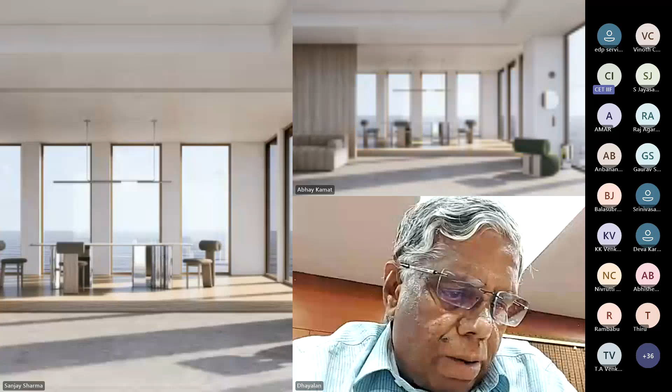We have invited Mr. J. Balasubramanian, who is currently working with Ashok Leyland Limited. I am having great pleasure in introducing Mr. J. Balasubramanian. He is head of analytics, AI and emerging technologies at Ashok Leyland. He is a dynamic, well-rounded visionary, innovator and leader with more than 26 years of experience in the automotive industry.

As a thought leader in data science and analytics management, he is passionate about using technology and data to address business problems. A practitioner of foresight and horizon scanner for new technologies, he has been leading creative artificial intelligence powered analytical projects that address the need for technology across business disciplines. He is highly sought after for business process re-engineering initiatives, and he has been part of large-scale business transformation projects that leverage digital technologies at Ashok Leyland.

He is known as a positive influencer with propensity for leading, mentoring and managing technical and behaviorally diverse teams. Mr. Balasubramanian holds a master's degree in statistics and he is an alumnus of Indian School of Business.

In today's session, Mr. Balasubramanian would be sharing his views on the role of AI and machine learning in Foundry, taking us through the opportunities for leveraging artificial intelligence to enhance efficiency and innovation in Foundries. Now I am leaving the floor to Mr. J. Balasubramanian. Sir, now the floor is yours, you can start the presentation.

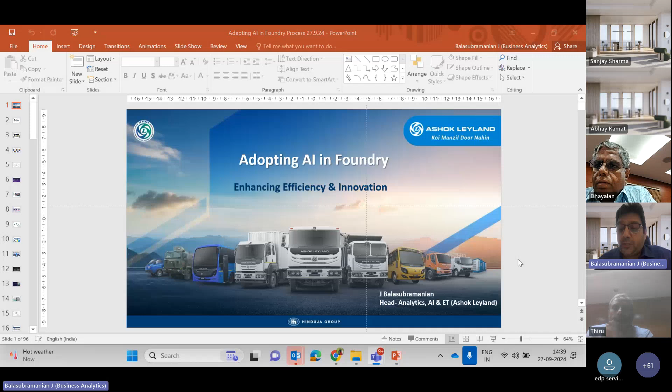Just when somebody says audio is not clear - am I loud and clear? Yes, you are very clear. Okay, thank you, just a minute. Let me start sharing my screen and let's get started. Please let me know if my screen is visible. Visible, sir, yes sir. Visible sir, thank you.

So let's quickly get into the presentation. For the next course of 1 hour and 1 hour 15 minutes, I will try to take you through the various facets of artificial intelligence, how the applicability is there in Foundries, and the kind of synergy between AI and the work what we do at Foundries.

It will definitely be very useful to know people who are keen and have an aptitude to work with numbers and try out more mathematical algorithms to improve the efficiencies of foundries. So without much ado, let's get into the topic.

Just to be quick, I represent Ashok Leyland and I've been part of this organization for close to 26 years now. I joined after my graduation, and I'm privileged to be associated with this organization for a very long time, having had stints across various functions, which gave me immense opportunity to learn.

For people not aware about Ashok Leyland, we are the second largest manufacturer of commercial vehicles. We have a full range of vehicles from 2.5 tons to 49 tons gross vehicle weight, and buses from 16 to 80 seats. Our annual turnover is 2 billion plus, and we are listed on the NSE. We have several manufacturing facilities, including 2 foundries, one at Ennore near Chennai and one at Sri Perumbudur. These are our 2 major foundries, and we cater to both in-house and external clients.

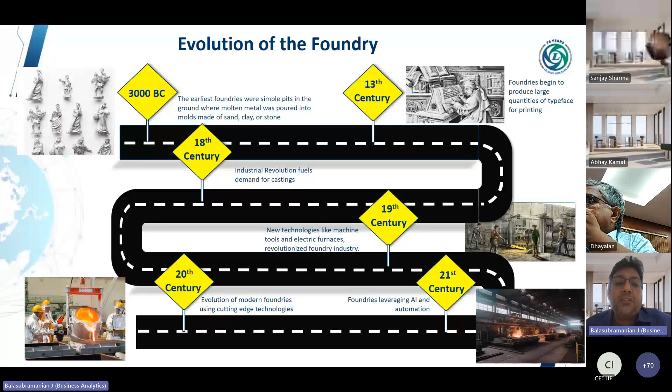To me, while the foundry industry has evolved over time, the fundamental core principles of manufacturing remain the same. I'm not a person who has worked in foundry or manufacturing directly, but from a third person's perspective, observing multiple different industries has given me a lot of opportunity to learn about the entire foundry industry. I find that the commonality across these industries, in terms of foundry, remains in how castings get developed.

For example, we start with the preparation of sand for casting. Then we look at how we manufacture cores, which help make hollow castings. Then we look at melting metals, putting the molten metal into the mold, and finally doing the fettling and grinding work to ensure the end product comes out perfectly. So the core 5 main activities remain the same, and today's topic focuses on how AI will be helpful in each of these activities.

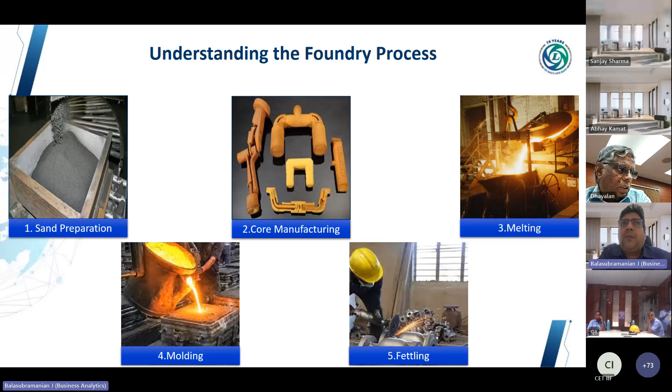So that's what I'm going to explain, how every single activity, though this has been happening for centuries together, but today how AI can play a much better role to improve the efficiencies of these processes. So that's what we are going to talk about.

When we look at foundry per se, there are 7 big challenges we observe. The first and most important challenge is quality deviation. A lot of scrap, rework, and customer claims keep happening. So one of the biggest and major pain points for the foundry is essentially the quality aspect of it.

Second is machine downtimes. There are a lot of breakdowns, or unplanned maintenance, or machine failures happening. These are other major challenges, and once the machine stops, your line stops, your entire activity comes to a grinding halt.

Third is productivity - in terms of material, yield, human resources, production and cycle times. These get impacted because of the high pressure, high intensity job. There's always a challenge of getting the best productivity out of humans and resources because of the tough working conditions. So this has been a major challenge.

Fourth is resource usage. Generally we observe a lot of planning inefficiencies. There are high inline inventories and material waste that happen in foundries, because that's how the entire business has operated over time, and a lot of inefficiencies have built up into the system, which currently are being addressed through multiple technologies.

The fifth and major impact today, when everybody talks about foundry, is the environmental aspect. Foundries emit huge amounts of gases, and carbon dioxide emission is pretty high there. There's a lot of material usage and energy consumption because of the furnace and stuff like that, which contributes to a lot of environmental degradation - again a big challenge today in the foundry industry.

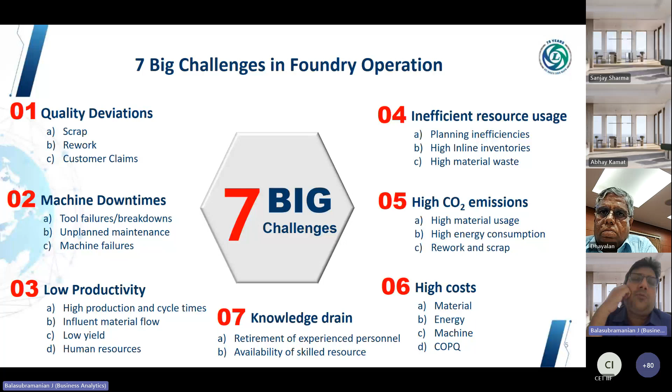Today we are looking at how AI can help us improve the efficiencies, improve the viability, improve the cost. As we go along, we will look at how some of the tools and techniques of AI actually contribute to the improvement of the entire process in foundries.

So when I talk about AI, AI stands for artificial intelligence - I'm sure everybody knows. But if you ask a layman what artificial intelligence means, the English definition is: AI is a branch of computer science that deals with the simulation of intelligent behaviors in computers. That's a very technical definition. In simple terms, AI means a computer which has the ability to think and perform intelligent action.

Let me quickly share an example with you. So if I talk about an autonomous vehicle, I have an autonomous vehicle...

Autonomous vehicles are self-driving vehicles where there is no driver and the car is driven by the computer. An AI system is essentially trained for a car to drive on the road without causing any damage, and the car should be able to recognize a shadow and not stop just because the shadow looks like a human. It is programmed to drive over a shadow, but the same car, when it looks at a signal and sees a human, it is trained to stop. So that's the simplest way of explaining what AI does.

So when the computer is designed to think, the computer should not think that because it can drive over a shadow it can also drive over a human. No, that's not the way. When it sees human life, when we give the element of human life into the complexity, the computer should understand and say that while I can drive over a shadow, I should not be knocking over a human. That's the AI that comes into play, and that's how the entire system actually gets designed.

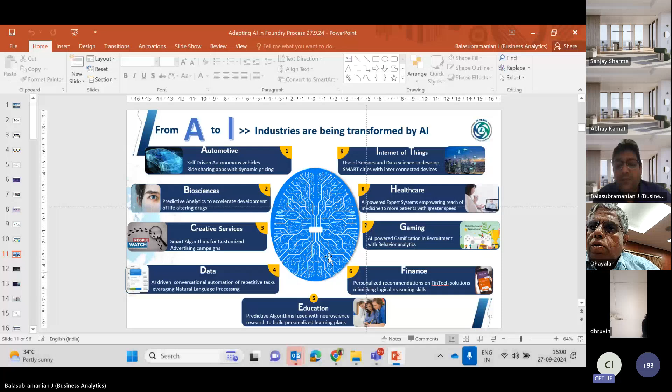Sir, you got muted. JB sir, you got muted. You unmute yourself, sir. Now clear? Yeah, clear. Okay, go back to where the presentation was. Yeah, now it is clear. So this is where I'm talking about.

So every industry today is actually influenced by AI, and we will see how AI plays a major role in the foundry industry. Coming to the foundry, as I said, there are 5 major activities which we have envisaged: sand preparation, core manufacturing, melting, molding, and finally fettling. We will see the applicability of AI in each of these aspects of business.

So let's start off with the sand preparation. Sand is the fundamental ingredient required to prepare the mold and ultimately the casting. If the right type of sand is not used, or sand with the right properties is not used, it will impact its strength, the permeability, the thermal stability of the castings, and so on, leading to dimensional inaccuracies, rejection, and rework. So let's see the type of activities AI can help with to improve the quality and effectiveness of the sand used in manufacturing castings.

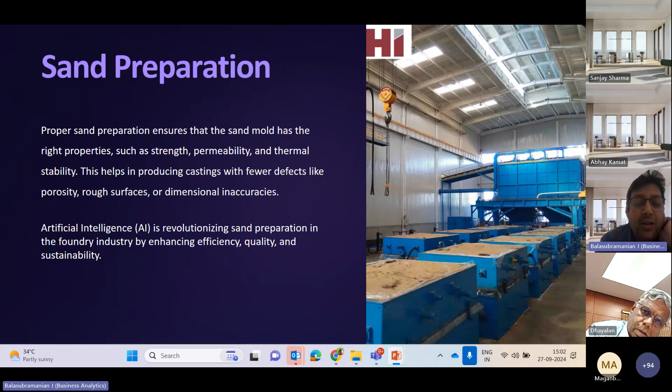Let's get into how AI will actually help you. In sand preparation, AI has got 4 major aspects. One is collecting data to see how we improve the sand quality. For example, getting data on the right grain size of the sand, the moisture content, the clay, the temperature, using a lot of sensors.

We have DISA machines, the machines which actually process the sand, and you find a lot of sensors attached to it. Analyzing that data, we have a lot of algorithms to understand, analyze, and see what is the grain size, what is the moisture content, the temperature, and to check whether the right quality of sand is actually being used.

Then there is the second activity: predictive modeling, wherein we try to understand what sand properties can lead to casting defects. For example, if the sand is very hot, or the clay moisture content is very high, or there is a lot of air present in the sand, it might lead to defects in the casting getting manufactured.

Based on the kind of input that comes in from the sensors, we can really understand what is the kind of casting defects that will happen on the sand portion. And again, we have a lot of algorithms to address these issues.

The third is on automated control and optimization of the sand preparation. This is another major activity wherein we add water, do the mulling time, add binders, and so on. To what extent water addition has to be done, or what temperature to be maintained, how do we automate this? This cannot be a manual task considering the huge quantity of raw material we process. So how exactly are the automated systems running? This is where the automated control and optimization AI-enabled systems come into play.

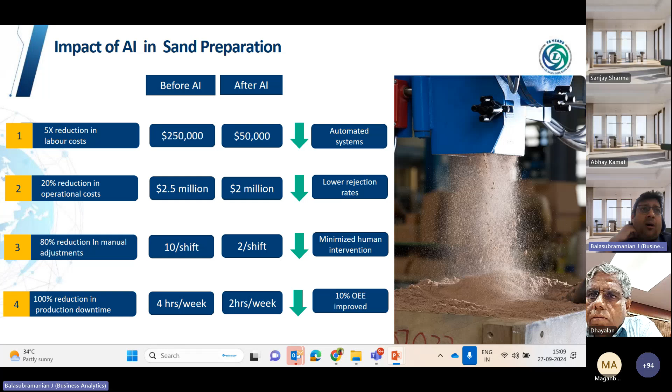And this is not just theory. There are a lot of foundries which have done this and enjoyed huge benefits. For example, a foundry was able to reduce its labor cost in sand preparation by nearly 5 times, from $250,000 to $50,000, through use of automated systems. Then there was around 20% reduction in operational costs, because with the optimal recipe and proper sand properties, the rejection rates came down drastically. Then there has been 80% reduction in manual adjustments — earlier there were around 10 adjustments per shift, and after the introduction of AI, just to address any exigencies, only 2 adjustments.

Sir, again you got muted. Balasubramanian sir, you got muted. Yeah, I think there is some setting that is muting after some time. Yeah, I don't know, just okay. So I think it is getting muted, but nevertheless, I'll just keep it on. Yeah, and so, screen is visible. Hello. Yes, visible, sir. Yeah.

And finally, there has been a reduction in production downtime from 4 hours to 2 hours, a 50% reduction, and there's a 10% overall improvement in overall equipment effectiveness. So if you see the benefit of AI — while I haven't gone into the depth of how these algorithms operate — using these kinds of algorithms in the preparation of sand, the foundries have got such amount of benefits in terms of the quality of sand that is getting used.

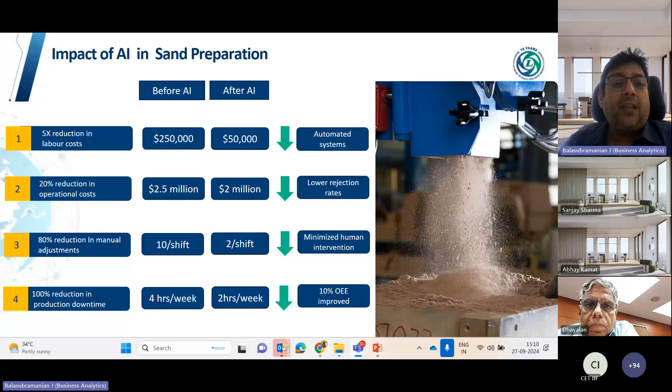Then coming to the next activity, on the core — just a second. Coming to the next activities on the core. So core, as you all know, is the hardened sand that actually is used for manufacturing the hollow blocks. And here, this is very important. When we want to manufacture the hollow castings and all, if the cores are not as per the proper specification, it might lead to a lot of casting defects.

So this is where AI is actually today revolutionizing the core manufacturing process, by predicting equipment maintenance requirements, enhancing quality control, and automating recurring tasks in terms of building the cores. So let's see again how different algorithms can actually help in the core manufacturing business itself.

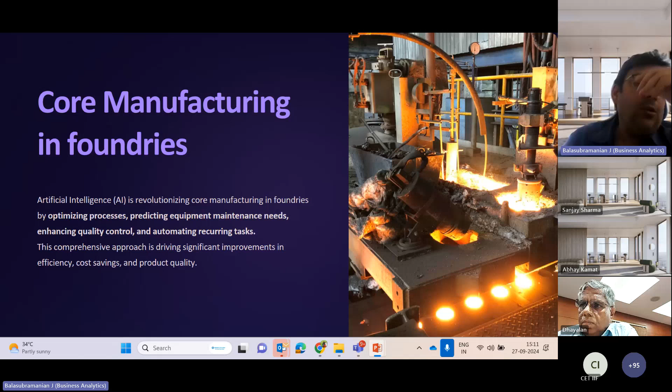So if you again look at the core manufacturing activity, four major sub-activities happen. One is, how do I build up an optimal core recipe? That is again using the optimal recipe in terms of shell box core, hot core, or cold core — what properties of sand I should have, so that my core is getting manufactured properly. For that, I need real-time data on sand, on binder content, curing time, and so on.

This is being measured by AI-powered sensors. And then a lot of predictive algorithms are used to check when the equipment will fail. In core manufacturing, equipment life is very important, because if the equipment fails in between, the core manufacturing might come down. So how do I look at predictive maintenance and proactive maintenance schedules to ensure that machine uptime is maintained?

The third is defect detection and classification, where a lot of computer vision is used to check whether there are cracks or holes in the cores, or sand inclusions, which will impact the castings that get produced. So a lot of computer vision and image vision is used in this activity.

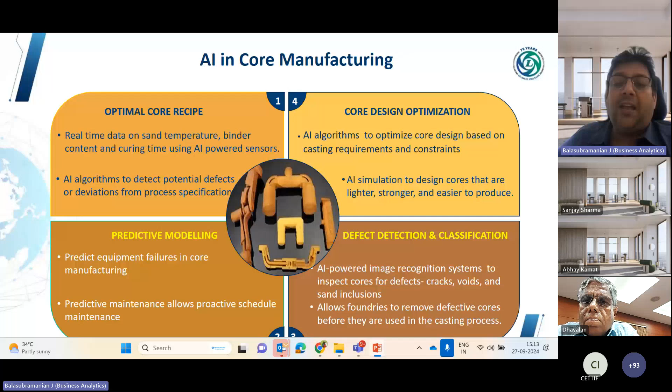And finally, the fourth major activity is, how do I optimize the design of the core? So these are the four major activities where AI is getting used.

For example, in defect detection and monitoring, we use a lot of neural networks to check how the machine is actually performing. They are very important to predict the remaining useful life of a machine, because they handle a lot of historical sequential data and reinforcement learning. If you remember, I spoke about reinforcement learning as part of the video games we played earlier.

These systems, the algorithms, actually learn from previous defects - when the machine failed, what was the kind of instance that led to the failure. Based on that knowledge, it automatically learns, and going forward it will be very helpful to predict the remaining useful life of my core manufacturing machine.

Then again, a lot of classification algorithms check whether a machine fault has happened or not, or what the reason for the machine fault is. We use some algorithms like random forest, and another algorithm like decision trees to classify the cores as good or bad.

We might manufacture cores in huge quantities. How do we actually check whether the cores are good or bad when we have a huge amount of data with their specifications? Using that data, we use algorithms like decision trees to check if the data is in line with the specification - it classifies the core as good. If not, it classifies the core as not good. So that's where the decision tree algorithm comes into play.

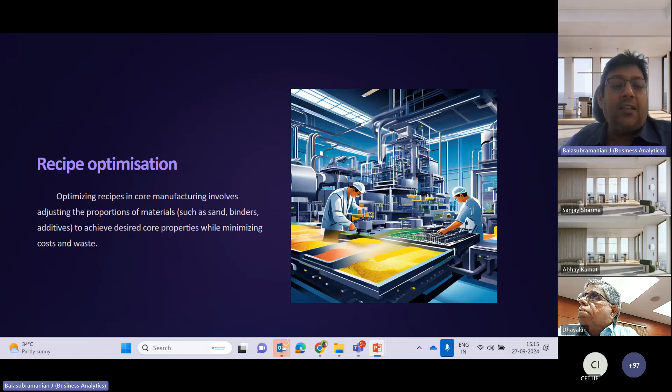In recipe optimization, such as use of sand, binders, and additives, we use algorithms like genetic algorithms, which are used to iteratively mix the sand and the binders, because genetic algorithms actually mimic human behavior. For us, whenever we want to build a certain thing, we iterate, we try different binders and mixtures, and finally arrive at the right combination.

But on a real-time basis, using a large quantity is very difficult to do. And that's where genetic algorithms come into play, to essentially identify what kind of binder properties have to be used to ensure that the core is manufactured properly.

Then we have to ensure that the core hardness is maintained. We have something called gradient boosting algorithms, which we use to predict and check whether the core hardness is maintained across the different cores that get manufactured.

And finally, we have artificial neural networks to see how to build the optimal recipe for the core - like with sand, where we have the optimal recipe preparation for the type of sand to be used. Similarly, we use AI and artificial neural networks to check how much binder has to be added, what temperature should be maintained, and what design specification should be there for the core. This is evaluated through a concept called the artificial neural network, which helps improve the quality of cores.

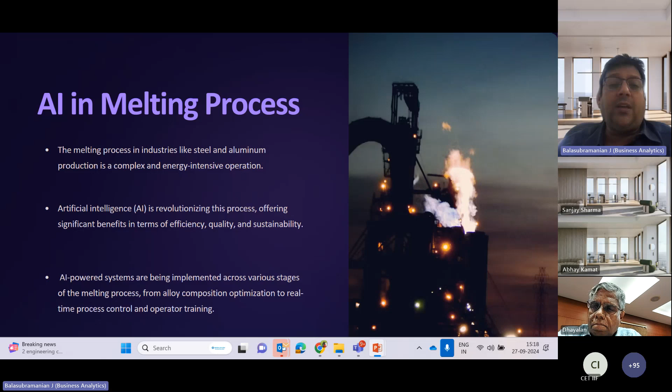If you see melting, there are five major activities. One is the use of AI in real-time process control for detecting anomalies, meaning deviations from the prescribed process. There could be deviation in temperature, chemical composition, or pressure, which drives consistency in melting quality. So how do you use AI to actually measure the real-time process control?

The second most important thing is the alloy composition. How do you maintain the optimal alloy composition for different kinds of metals being used so that you get the perfect casting? Again, the role of AI is very critical in identifying the optimized alloy composition for the best casting manufacture.

Fourth is the adaptive control system, which will automatically adjust furnace settings based on external conditions, or when the raw material and environment conditions change. The furnace automatically understands the changes in these elements and sets the conditions.

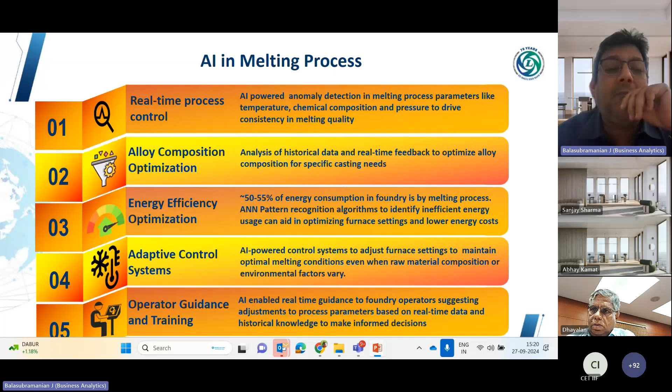I would not get into depth of these slides due to paucity of time, but when we talk about real-time process controls, multiple algorithms actually capture data on the internal and external environment, and using different algorithms, they process and see what is the impact on the melting activities.

On the alloy composition, here I might spend some time. We have multiple algorithms like Bayesian optimization, which I spoke about earlier, to arrive at the optimal composition of alloys. You can also cluster different alloys based on similar characteristics using clustering algorithms to identify the patterns and relationships between multiple alloys and their impact on the castings.

Finally, we have neural networks, which can be used to predict properties if you have a new alloy coming up. Based on past learnings from alloy properties, we can predict what the alloy properties of the new alloy being produced would be. So these are some of the major algorithms used in alloy composition.

In terms of energy, this is again a major activity where we use a lot of time series algorithms, like time series forecasting, to predict what the energy consumption will be in the foundries, and use real-time algorithms for real-time energy management.

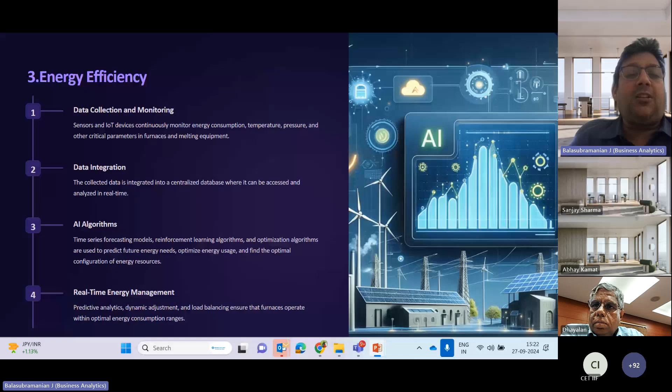This is another major area where predictive algorithms like time series and regression modeling are used. Linear regression essentially predicts the energy consumption that is going to happen in the foundries for a given set of castings and energy requirements.

Finally, on the adaptive control system, this is where the system should learn whenever it encounters a mistake. It should self-learn and take corrective action through reinforcement learning. This is where the reward and penalty mechanism comes into play.

For example, when I use reinforcement learning on parameters like temperature, fuel injection rate, and airflow, how do I use it at an optimal quantity to maintain the melting conditions? I should not pass out a huge amount of air, or I should control the airflow. I should not drop the temperature drastically. I should not inject my fuel at a very rapid rate. I have to control these things.

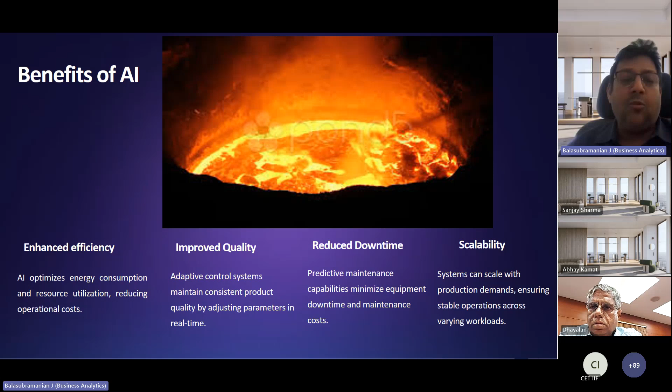We have two more processes to go. One is on the molding process. This is where molten metal goes into the molds to essentially form the castings.

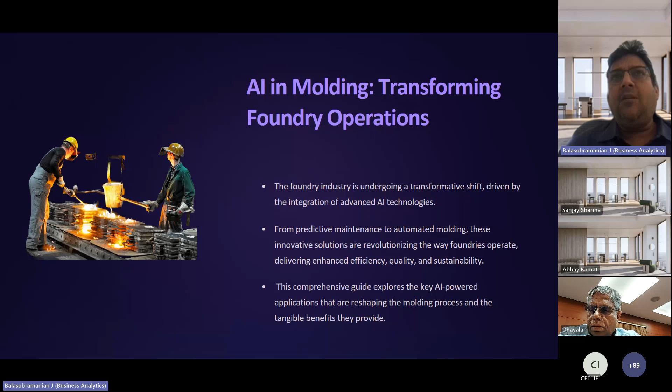Here again, AI has a major role in terms of maintaining the temperature at which the molten metal goes into the mold, how the mold gets filled with molten metal, and also looking at the properties of the molten metal that impact the quality of the mold.

Some of the areas where AI is used is predictive maintenance of molding, to check the molding machines or the mold, whether the mold is going to fail or, based on deterioration in quality, when it will actually fail. This is where predictive maintenance comes into play.

Second is defect detection and classification. A lot of image recognition is used here because this is where the physical product comes out for the first time. Image recognition identifies cracks, voids, porosities, fissures due to cracks, sand inclusions and so on. Identifying these things with the human eye would be very difficult, and that's where image recognition comes into play.

Then we have automated mold finishing, which takes care of surface grinding, polishing, and checks how the consistency of the mold is maintained.

Then we have virtual mold simulation. A lot of simulation is used to design new molds, because physically designing molds is a challenge. So when we have complex design, that's where 3D simulations come into play through virtual molding. And finally, mold maintenance, where we use a lot of pattern recognition algorithms to check and measure how we can extend the mold life. So these are five areas where AI can essentially be used in the molding process.

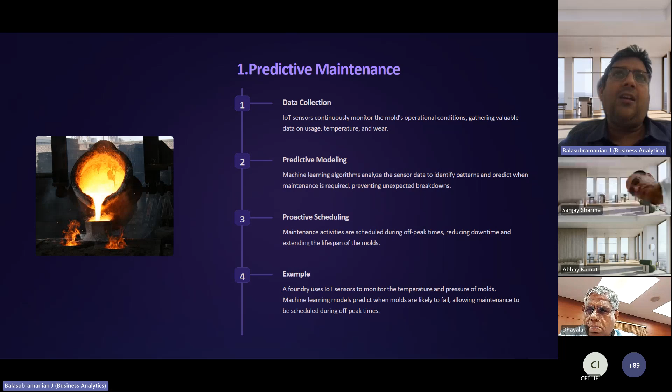Some of the major algorithms we use for machine breakdown, predictive and proactive maintenance include predictive algorithms like linear regression and neural networks to predict, based on sensor data like temperature and pressure of the molds, whether the mold is going to develop any failures. We also use algorithms like logistic regression to check whether the mold is of good or bad quality. These are mathematical, supervised learning algorithms used to predict the likely failures of the mold.

In terms of defect detection, as I said, computer vision is essentially used to capture high quality images of the casting and molding, to check whether there is any defect emerging on the molds. And for defect classification, we use algorithms like the convolutional neural network.

This is one of the major algorithms used to classify the defects into good or bad castings, or good or bad output. Quality assurance algorithms are essentially used to classify whether the casting is good or bad. So these are some of the essential major activities happening in terms of computer vision at this point in time.

I will try, if time permits, to show you a video that I have enclosed here.

Then there's automated molding, where reinforcement learning algorithms come into play, because whenever we talk about automation, the system has to learn on its own for changes. That's where the reward and penalty mechanism defines automation itself - meaning the system is able to perform tasks on its own. So when we talk about molding activity handled by complex robots, we have a lot of reinforcement learning algorithms built into the robots to identify and perform repeated tasks without any issues.

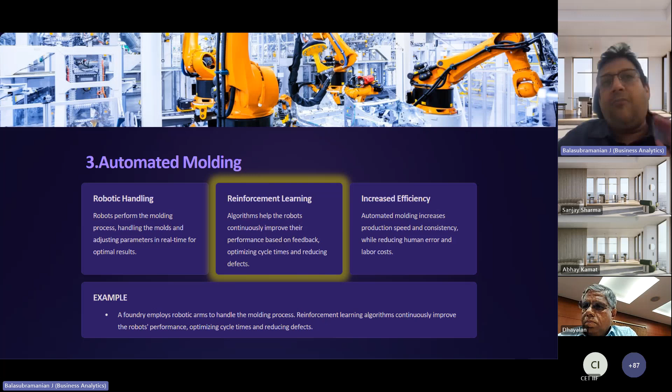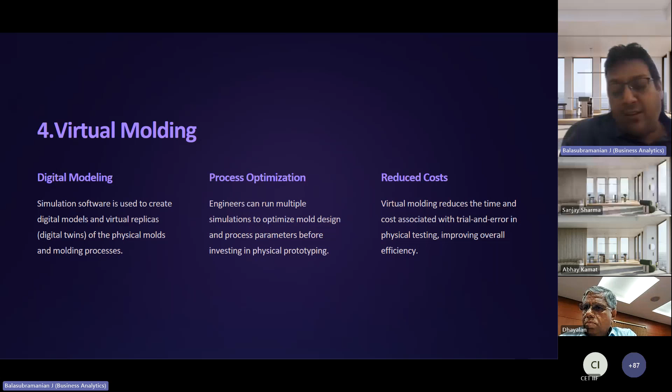And in virtual mold simulation, as I said, this is an area where we use a lot of simulation to build up the mold. We will cover this in a subsequent slide when we actually reach there - this is where the simulation essentially happens. And the ultimate, final one is mold maintenance.

This is very, very important because preparing a mold itself is a very expensive proposition, given that it has to be manufactured to specification - it is the shape that gives life to the casting. So how do you actually measure or maintain the mold?

Through predictive modeling or optimized maintenance. This is where we use a lot of machine learning algorithms like neural nets to understand how to optimize the mold and its specifications. Any change in specification or dimensions of the mold - how do I detect that change has happened - is done with predictive models and neural nets to understand the adherence of the mold to specifications.

For example, one of the foundries has used this kind of predictive algorithm to schedule its resources and allocate them for mold maintenance activities. Whenever we look at mold maintenance, there's going to be downtime in mold availability, so how you allocate resources to handle that downtime is a very critical activity. You need to predict the schedules and downtime of the molds, and also use algorithms to see whether the mold is efficient or not. This is how mold maintenance using AI essentially happens.

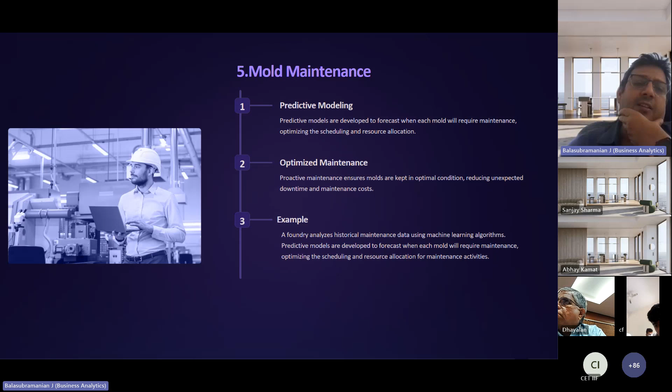Anybody? Hello? Yeah, okay, I'll come back.

Some of the major benefits in terms of improvement in quality: a 50% reduction in quality issues has happened through use of AI.

In terms of productivity, there has been a 20% reduction in unplanned downtime of the machines due to higher uptime of the molds, leading to increased productivity and reduction in waste. 60% reduction in material cost and waste has come down by use of AI.

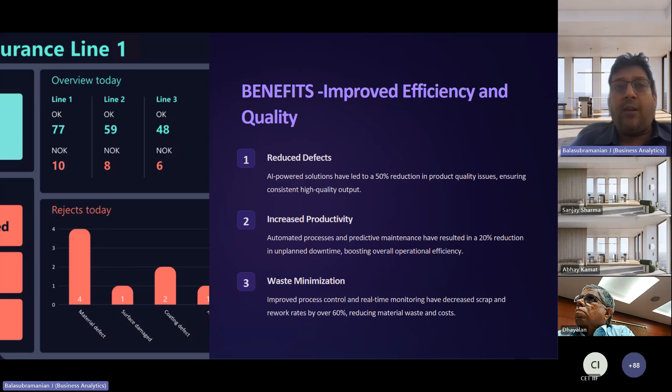So everywhere, I'm trying to correlate how AI is actually benefiting each of these activities. Finally, if you look at the fettling process, this is the final process, which is again a very labor intensive process, involving giving the final shape to the product through grinding, polishing, and smoothing to give the final shape to the product.

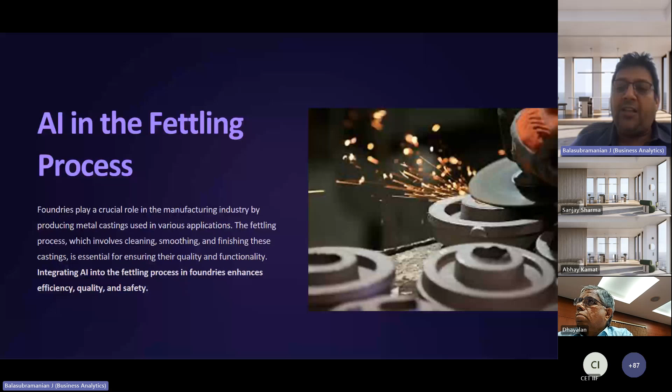Again, AI has a major role in terms of identifying defects through image recognition, using robots to do it or an automated process, using adaptive process control to automate the entire process of adjusting parameters for the fettling. Look at the right tools to monitor the condition of fettling through image recognition. Then look at bottlenecks by analyzing the process data to identify which processes are bottlenecks to the fettling process. And finally, look at AR VR systems, augmented reality and virtual reality, to train the workforce on how to do the fettling process. So these are 6 major areas where AI has a major role in improving the fettling process.

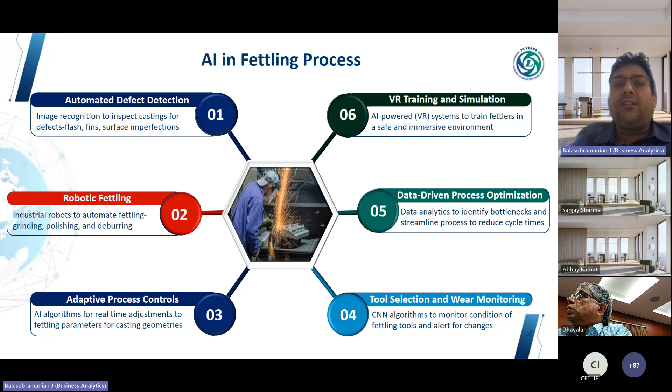For example, when I talk about the defect identification system, it's an AI enabled camera based system. You see a lot of cameras fitted in foundries capturing images in real time and then comparing with historical images to check whether there are irregularities in the castings being produced, classifying it as a good or bad casting.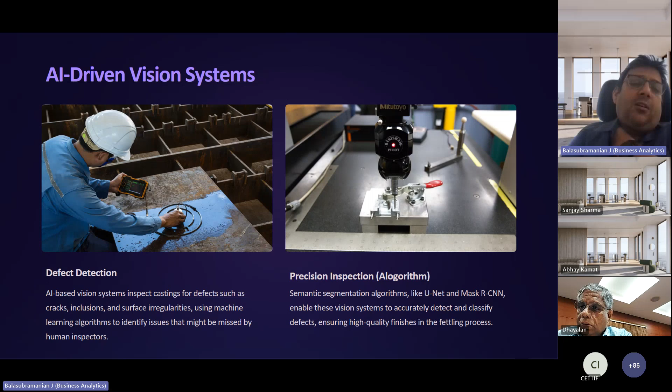There are some advanced algorithms like UNet, MASK, and YOLO. These are some of the algorithms used in AI-driven vision systems for identifying defects in castings through computer vision.

Then in terms of process optimization, we look at how much time has to be set for grinding of the casting, how much time should be spent on smoothing, and what resource availability there is to do the activity. So we need an augmented process through a concept called linear programming, which is used to allocate resources, schedule production, and optimize the fettling process.

Similarly, when we talk about automated systems, we use reinforced learning, wherein the system will automatically understand how to allocate resources and also monitor the parameters as to how to control the entire specification of the fettling process.

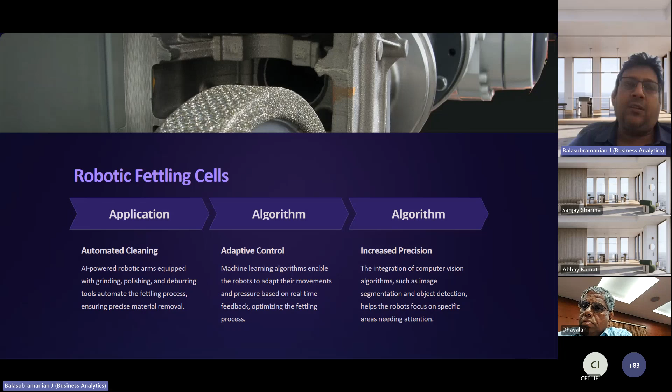And then the use of robots to do the fettling is hugely applicable for automated cleaning of the castings, and a lot of algorithms are programmed. The robots are programmed with reinforced learning to have high precision jobs done on the fettling lines. I'll be rushing a bit because these are complex activities, but this is the entire activity in Industry 4.0. Robots play a critical role, and they are powered by AI powered algorithms.

In terms of predictive maintenance, the health monitoring of the fettling equipment is very critical, and we have statistical algorithms like regression to predict whether the equipment is going to fail, or what will be the precision of the equipment in producing a good quality product. So these are some of the areas where AI is applicable in the fettling process.

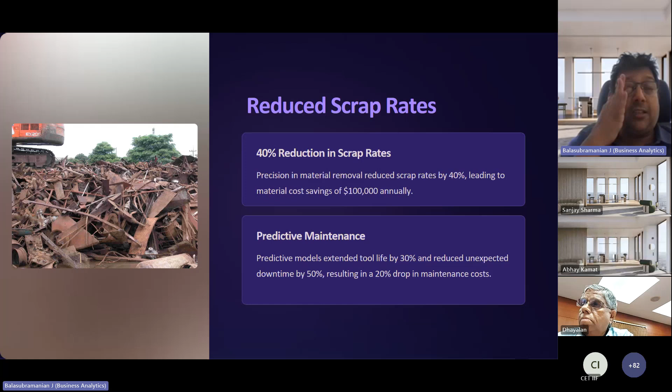The key benefit is that by using AI, we have got around 40% reduction in scrap. In terms of predictive models, there has been an increase of 30% in tool life, machine downtime has come down by 50%, and there's a 20% reduction in maintenance cost. These are some of the benefits our foundry has enjoyed.

And similarly, safety has also improved because of the requirement for the use of automated fettling. Manual fettling has been removed, and there's been a 60% decrease in safety related incidents, and also a reduction in workplace injuries, because these are all very critical, highly specialized skill jobs which now have potential to cause injuries.

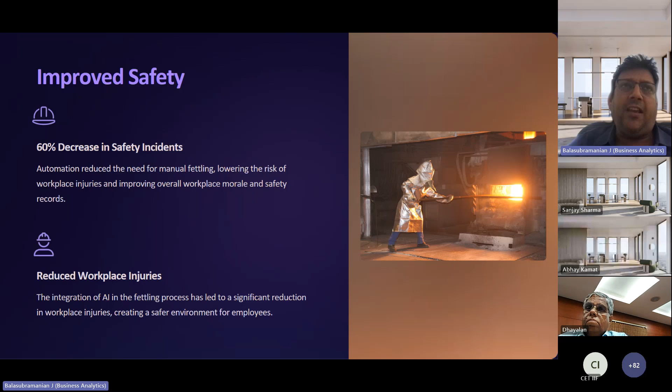And with the use of automated fettling, these amount of activities have significantly been reduced. So these were the 5 areas which I have covered where AI has played a major role.

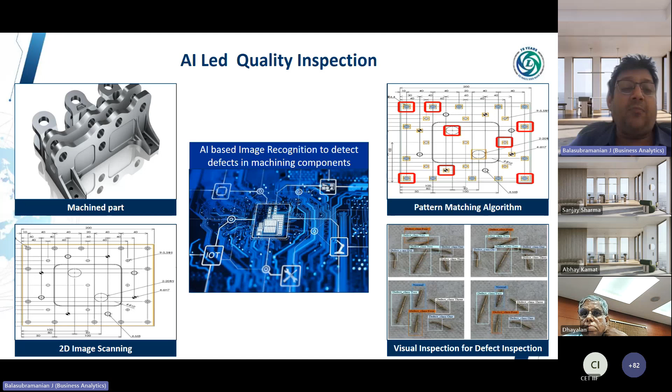Some of the other areas is essentially on quality inspection, where a lot of image recognition happens to identify the adherence of the machines to quality, through pattern recognition algorithms, visual defects, image scanning of the machine parts, and so on and so forth.

So these are some of the major technologies, whatever I spoke over the last 45 to 50 minutes, that is used in foundries in terms of AI. We have machine learning, computer vision, predictive maintenance systems, robotics, decision support systems, simulation, optimization of the supply chains, quality controls, defect prevention algorithms, and energy optimization algorithms.

So the foundry, if you ask me, is a gold mine, or a vast playground for applying AI to increase the efficiency and productivity of the entire system.

Just to summarize the different types of algorithms what I spoke across these areas, the next 2 slides essentially give you an idea about the type of algorithms and the applicability.

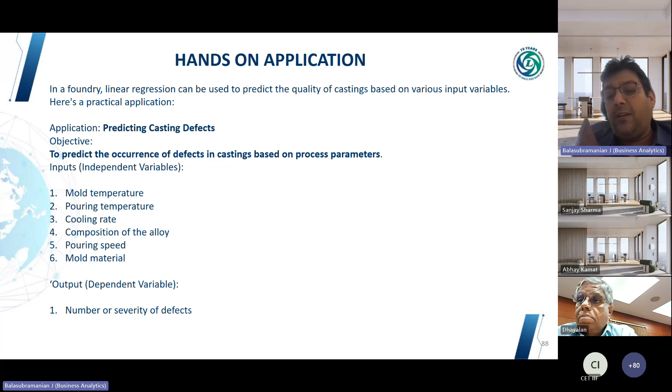So I have these 6 independent variables, and I have the output variable. So here what I'm going to do, I assume that I have got around 100 data points on these aspects. For example, the first observation has the molding temperature at 574.91, pouring temperature at 1306.29 Celsius, cooling rate at 11.42, alloy composition at 61.03, pouring speed at 5.52, and I have 75 defects. So like that, I have got around 100 different observations.

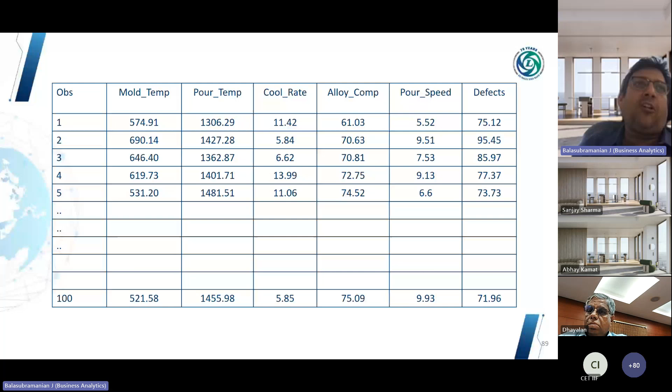So assume that I am now going to pour at a certain level with a specific pouring temperature or cooling rate. I would like to understand how many defects I would be left with, or how many defects are likely to come. So this is where we build something called linear regression. And when the model is actually built, the dependent variable being the number of defects, and the independent variables being the 6 variables what I showed.

If you look at the molding and pouring temperature, if they are at a very high temperature level, that means it will lead to more defects. The higher the temperature, the more number of casting defects, because it is beyond the optimal temperature that could impact the life of casting.

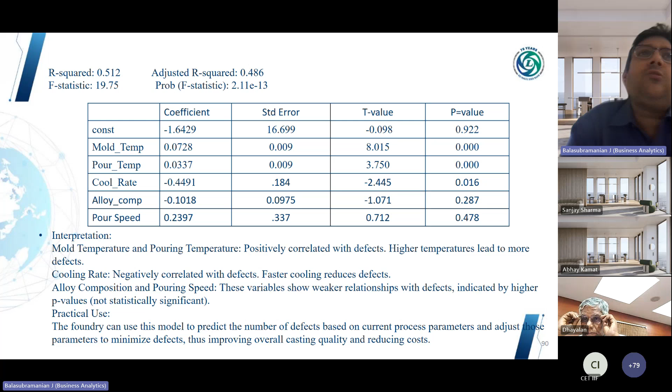So this is a simple example of how we can use a concept called linear regression to predict the number of defects that is essentially going to come in the casting. And while we have explained the use of AI here,

it has got severe challenges. It is not an easy task to just go and apply AI into the Foundry. There are major difficulties. One is in terms of availability of data. Second is the expertise to actually build these models and evaluate the outputs and interpret the outcomes. Third is integration with the existing systems.

Suppose we don't have a system to capture data at all, there's no point in going and putting up an AI system, because they are very cost intensive, and the ROI, the return on investment, will not be visible immediately. It will take a lot of time to actually mature and realize the benefits.

The fifth one is security and safety. We talk about automated systems, we talk about a lot of areas where we use robots and automated systems. But suppose they are not secure and they are prone to hacks and cyber security issues, they might act in a way that will actually lead to a lot of challenges in the Foundry operations itself. So they are highly security intensive.

And finally, change management - it is a culture change that has to happen. As I said earlier, AI is not going to replace humans, it is only going to aid humans. But if humans are not upskilled in terms of using AI, ultimately it will replace humans who are not skilled in using AI.

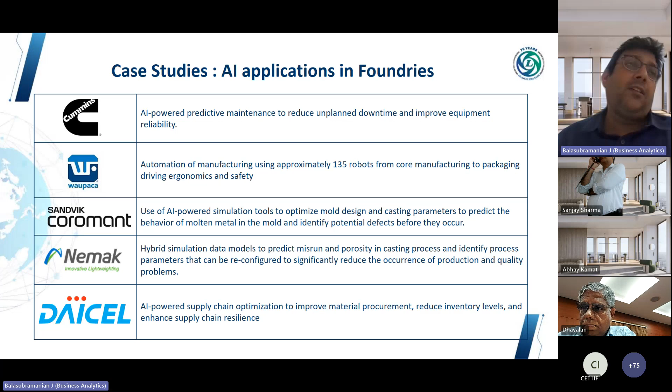And Daicel actually uses supply chain optimization to improve material procurement and reduce inventory levels in terms of foundry operations. So there are a lot of case studies available in the public domain of how foundries have been using AI to actually improve their efficiencies.

And some of the other emerging trends in foundries are additive manufacturing, digital twins, use of advanced robotics, and advanced simulation. So these are some of the additional trends.

Additive manufacturing today is essentially used extensively at foundries to manufacture and get components prepared. Physical components are getting replaced with components done through 3D printing and additive manufacturing.

Digital twins is another major area which essentially has a high initial development cost, but subsequently is used extensively for training and evaluating the efficiencies of the system, and this is very prevalent in the manufacturing area.

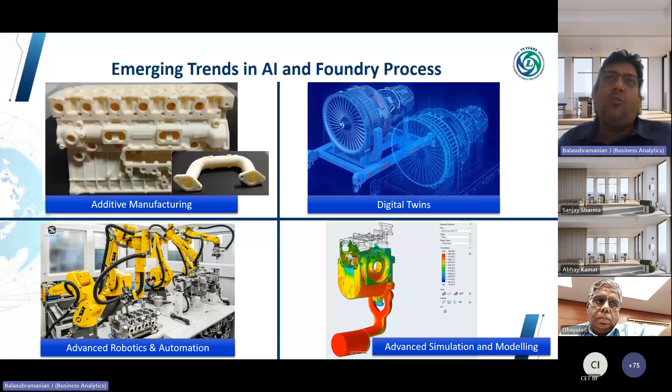Advanced robotics is used for automation, especially in the fettling process, or in terms of the melting and molding process. Simulation is used more extensively in mold designing, with virtual mold designing simulations being used.

Just to summarize, across the entire spectrum, there are a lot of benefits in terms of reduction in lead time, reduction in casting defects by around 20%, reduction in simulation efforts, and 50% reduction in machine downtimes. One of the biggest benefits of AI is higher uptime of machines and better quality of output, reducing the risk of stockouts and enabling optimal inventory management.

Ultimately, use of AI is also on the human front. It helps you monitor whether the workmen are wearing PPE kits. Use of image recognition helps identify whether people are wearing protective gear and whether the equipment is in proper shape, and based on that, alerts get generated if deviations are happening. So these are some of the major advantages of AI in foundry.

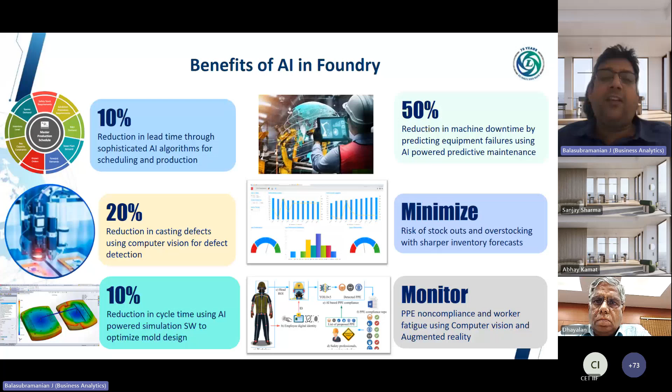Finally, today foundries are getting transformed by two major activities: technological advancements and environmental challenges. When I talk about technological advancement, there is a lot of pressure for foundries to move to lightweight aggregates. For example, today we see a lot of EV vehicles coming on road. In the automobile sector, EV vehicles are taking precedence, and as you know, EV vehicles run only on a battery and motor.

It doesn't require an engine, it doesn't require a transmission, and so on. So you need not have a heavy vehicle built - it's going to be very lightweight. The more the weight, the higher the battery discharge. So lightweighting of material is very important for higher yield and higher productivity.

These vehicles also have very complex designs, and there's a lot of requirement for rapid prototyping, because customer changes are so volatile that you might not have time to go back to the drawing board and start from scratch. So you need rapid prototyping available, which is where 3D printing comes into play and plays a very major role.

Then the process capability and process stability to scale up production is very important. And finally, you have stringent quality standards to meet because of the huge amount of norms in place.

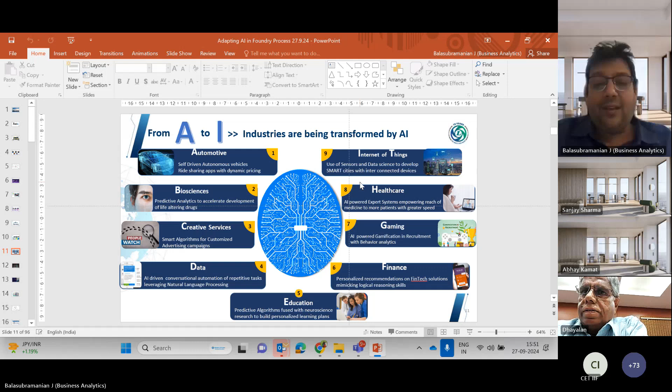I think a lot of work has to go into collection of data, because each foundry is different from the other. An enormous amount of data has to be collected, and to go across the board on all processes may be very difficult. We have to start somewhere. Data collection and data analysis are very important. I can also make out from what you're saying that man-machine interaction and machine learning will be something, but regression analysis and process control - knowledge of process control is very, very important.